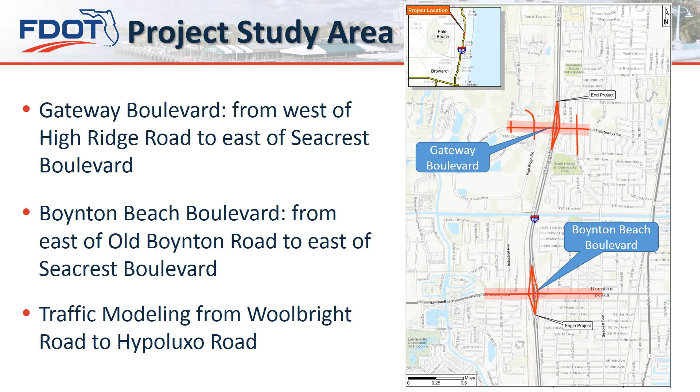The purpose of this public hearing is to share information with the general public about the proposed improvement, its conceptual design, all alternatives under study, and the potential beneficial and adverse social, economic, and environmental impacts upon the community.

The public hearing also serves as an official forum, providing an opportunity for members of the public to express their opinions regarding the project. Public participation at this hearing is encouraged and solicited without regard to race, color, national origin, age, sex, religion, disability, or family status.

Persons wishing to express their concerns about Title VI may do so by contacting either the Florida Department of Transportation District 4 office or the Central Office in Tallahassee. This contact information is also provided on a sign displayed at this hearing.

There are three primary components to tonight's hearing. First, the open house, which occurred prior to this presentation, where you were invited to view the project displays and to speak directly with the project team and provide your comments in writing or to the court reporter.

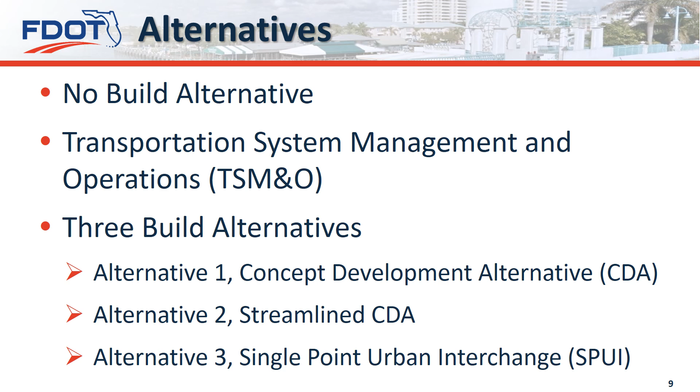Several build alternatives have been developed that would meet future travel demand and potentially minimize impacts to the community and the natural and physical environment. The build alternatives have been developed with input obtained throughout the study process from the general public, local governments, and environmental agencies.

NEPA requires that doing nothing to the existing conditions be considered during the environmental review process. This alternative is designated as the no-build alternative, signifying that no new improvements or construction would take place. Although this alternative does not meet the purpose and need for the project, it will be considered, serving as a baseline for comparison against other alternatives.

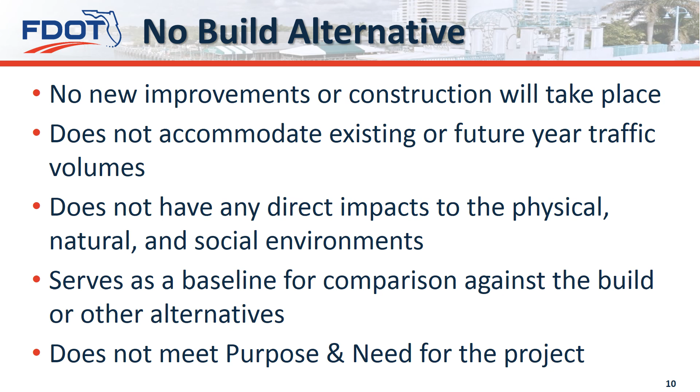The no-build alternative retains the existing roadway and interchange improvements and would not have any direct impacts to the physical, natural, and social environments, right-of-way, structures, or utilities.

The TSM&O alternative does not include roadway improvements that require right-of-way. This alternative includes utilizing the existing infrastructure and roadway design and optimizing traffic signal timing and coordination of signal systems. The TSM&O alternative alone cannot provide the much-needed capacity and intersection operational improvements.

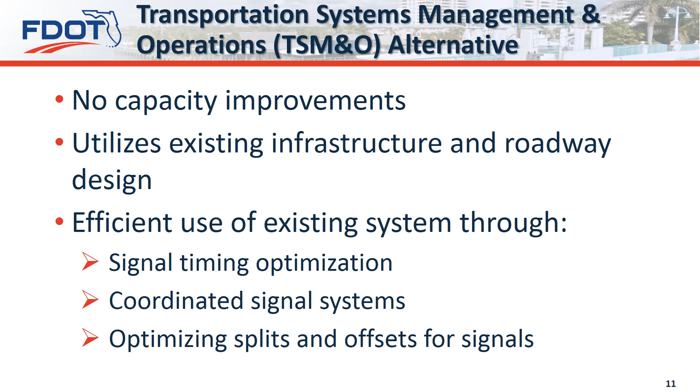Several build alternatives have been developed that would meet future travel demand and potentially minimize impacts to the community and the natural and physical environment. The build alternatives have been developed with input obtained throughout the study process from the general public, local governments, and environmental agencies.

These build alternatives include the Concept Development Alternative, or CDA, which is a conventional diamond interchange, a streamlined CDA alternative, and a single-point urban interchange, or SPUI.

Now we will discuss the proposed transportation improvements at the Boynton Beach Boulevard interchange.

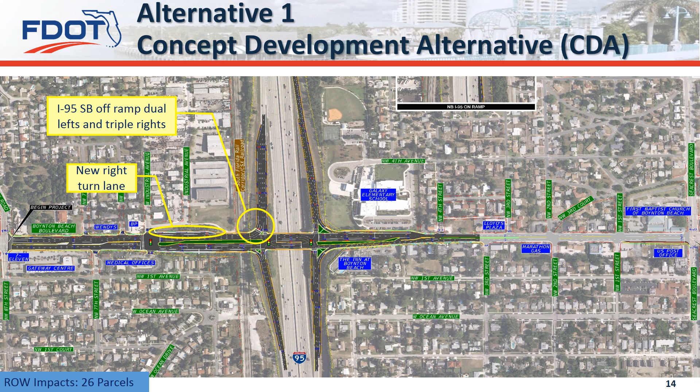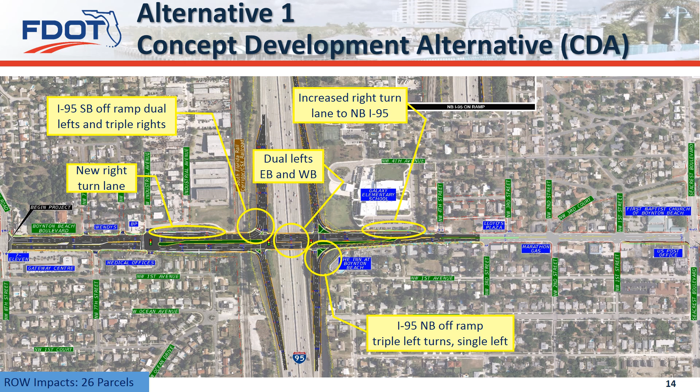The CDA alternative includes the following proposed improvements: a new right turn lane to Industrial Avenue, dual left and triple right turn lanes at the I-95 southbound off-ramp, dual left turn lanes eastbound and westbound, lengthened right turn lane to northbound I-95, and triple left turn lanes and a single right turn lane at the I-95 northbound off-ramp. This alternative is expected to impact 26 parcels.

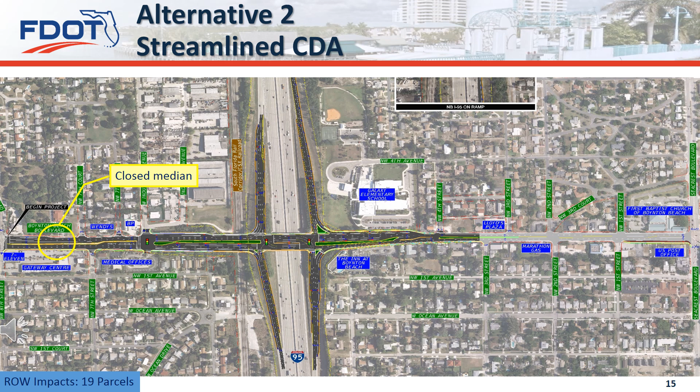The streamlined CDA alternative includes the following proposed improvements, similar to the CDA alternative with the following modifications: a closed median between 7th Street and Old Boynton Road, dual right and single left turn lanes and a shared left-right lane at the I-95 southbound off-ramp, and triple left and dual right turn lanes at the I-95 northbound off-ramp. This alternative is expected to impact 19 parcels.

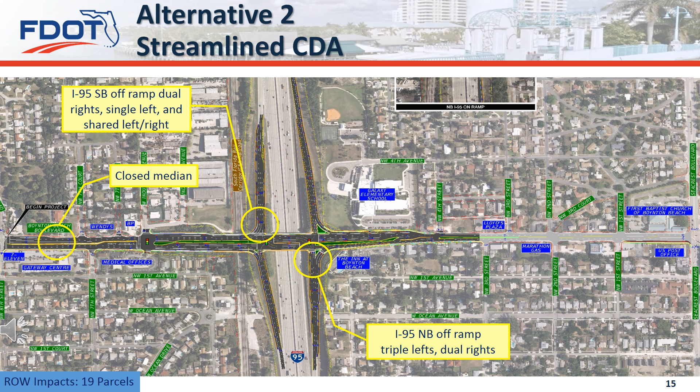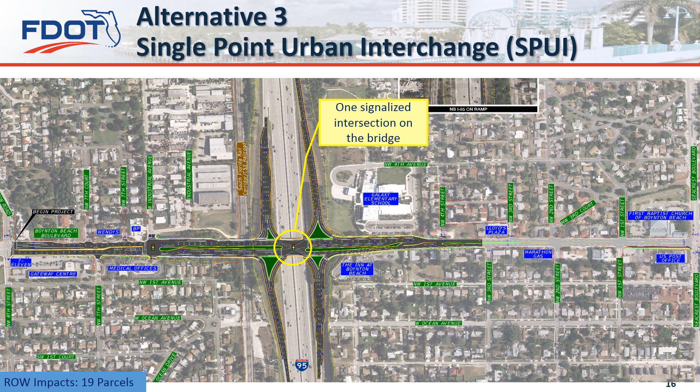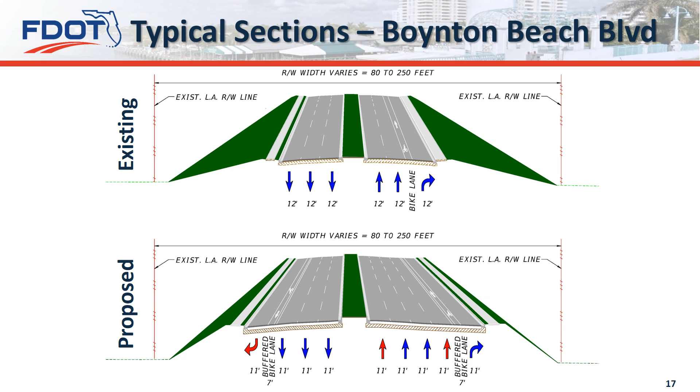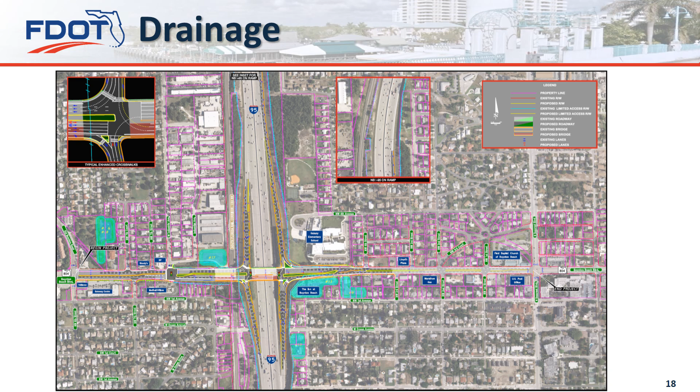In terms of environmental issues, all the alternatives have very similar minimal impacts. The largest difference between alternatives is related to right-of-way impacts. Build Alternative 1 would impact 23 parcels, and Build Alternatives 2 and 3 would impact 16 parcels. The recommended Build Alternative 2 has the potential to displace one resident.

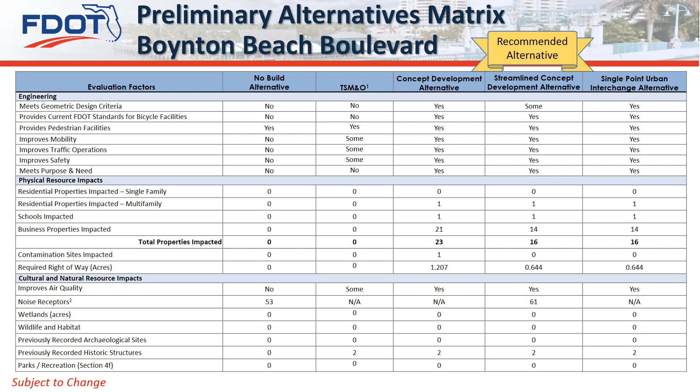Cost estimates prepared for all three build alternatives indicate the recommended alternative has the lowest total estimated costs at $39 million. All build alternatives provide better facilities for bicycles and pedestrians, with the addition of buffered bike lanes and enhanced crosswalks at the interchange ramps.

Preliminary traffic operational analysis indicates that all three build alternatives provide better traffic operations than the no-build and TSM&O alternatives, reduction to northbound and southbound I-95 off-ramp queuing, and reduction to intersection delays along the project corridor.

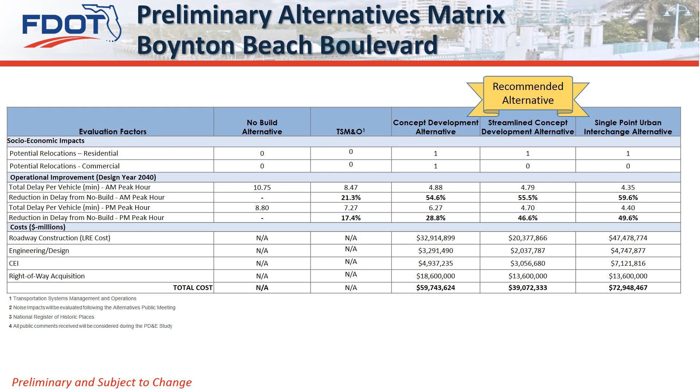Following the July 28, 2016 Alternatives Public Workshop, a meeting was held with FDOT District 4 to discuss the comprehensive resources evaluation, transportation and traffic studies, costs, and involvement of the public, local, and state officials, and select a recommended alternative for each interchange. The recommended alternative for the project area was chosen by FDOT on January 26, 2017.

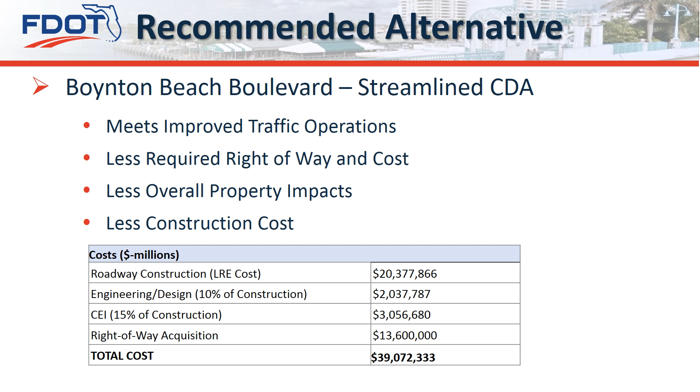Alternative 2, the streamlined concept development alternative, was chosen for the State Road 804 Boynton Beach Boulevard interchange. The Boynton Beach Boulevard preferred alternative is the streamlined CDA.

At Boynton Beach Boulevard, we anticipate 16 impacted parcels for roadway improvements, 2 pond sites, and the relocation of 1 family.

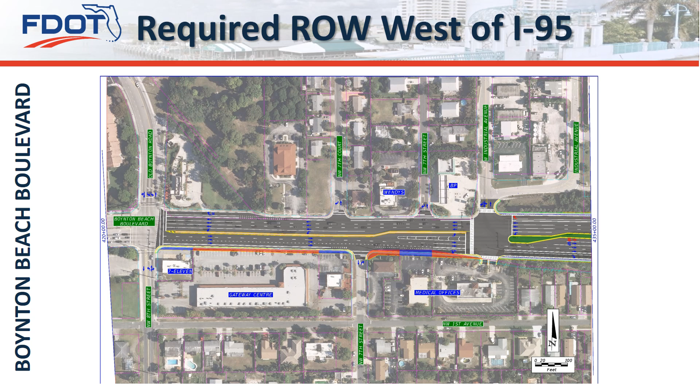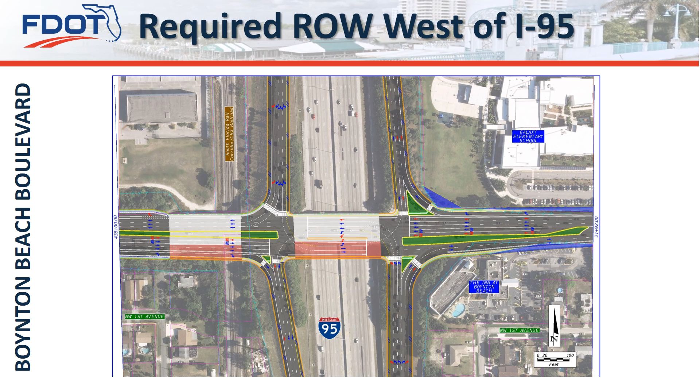West of I-95, the anticipated required right-of-way is located on the south side of Boynton Beach Boulevard. East of I-95, the anticipated required right-of-way is located on the north and south sides of Boynton Beach Boulevard. Farther east of I-95, the anticipated required right-of-way is again located on the north and south sides of Boynton Beach Boulevard.

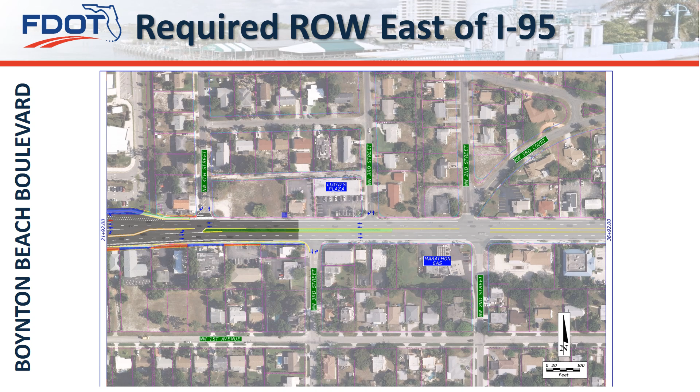Now we will discuss the proposed transportation improvements at the Gateway Boulevard interchange. Alternative 1, the Concept Development Alternative, or CDA, includes the following proposed improvements.

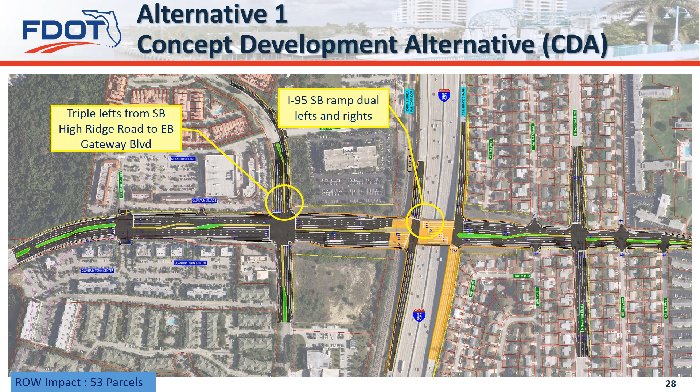Triple left turn lanes from southbound High Ridge Road to eastbound Gateway Boulevard. Dual left and right turn lanes at the I-95 southbound off-ramp. Single right turn lane from southbound Seacrest to westbound Gateway Boulevard. Dual left turn lanes from northbound Seacrest to westbound Gateway Boulevard. Triple left and single right turn lanes at the I-95 northbound off-ramp.

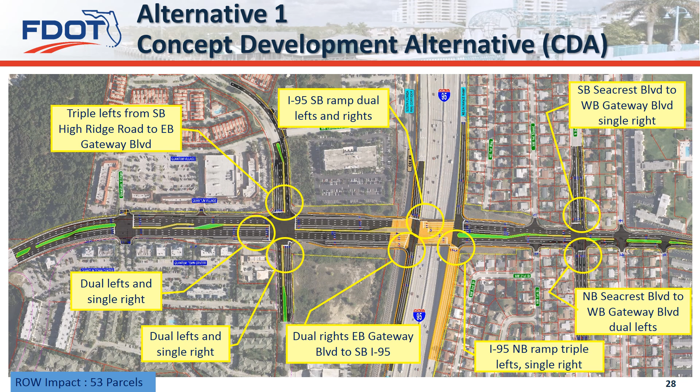Dual right turn lanes from eastbound Gateway Boulevard to southbound I-95. From High Ridge Road northbound, dual left turns and a single right turn to Gateway Boulevard. From Gateway Boulevard eastbound, dual left turn lanes and a single right turn to High Ridge Road. This alternative is expected to impact 53 parcels.

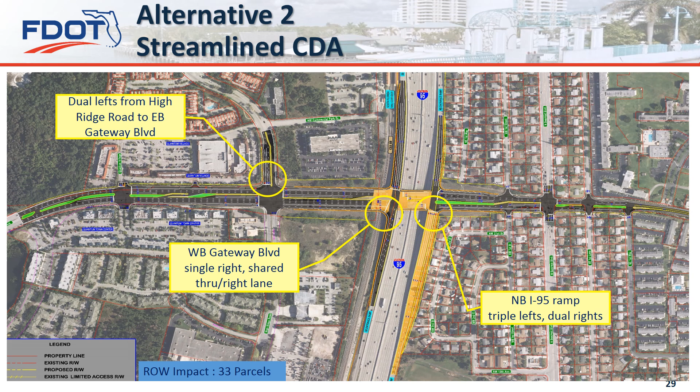The streamlined CDA alternative includes the following proposed improvements, similar to the CDA alternative with the following modifications: dual left turn lanes from southbound High Ridge Road to eastbound Gateway Boulevard; a single right turn lane and shared through-right turn lane from westbound Gateway Boulevard to southbound I-95; and triple left and dual right turn lanes at the I-95 northbound off-ramp. This alternative is expected to impact 33 parcels.

Alternative 3, the SPUI alternative, includes the following proposed improvement: 1 signalized intersection on the bridge. This alternative is expected to impact 33 parcels.

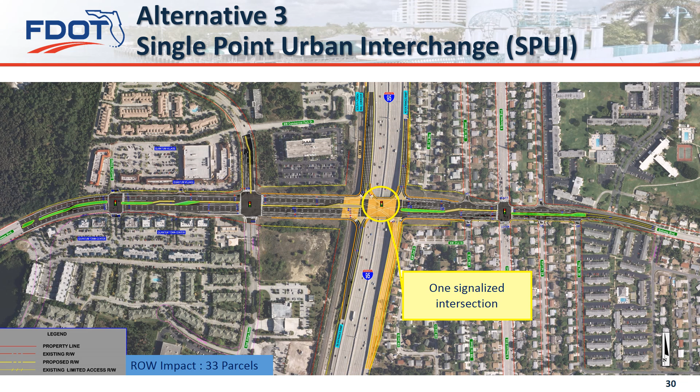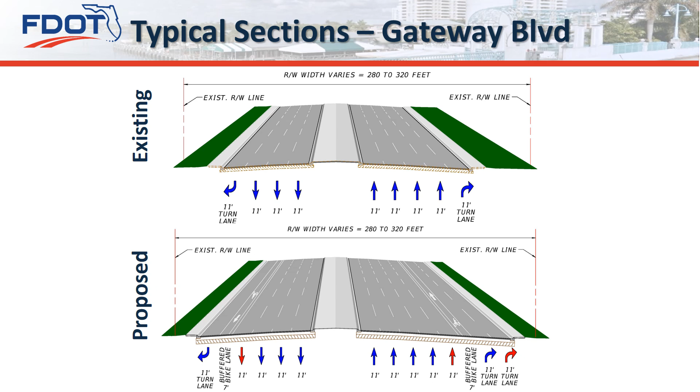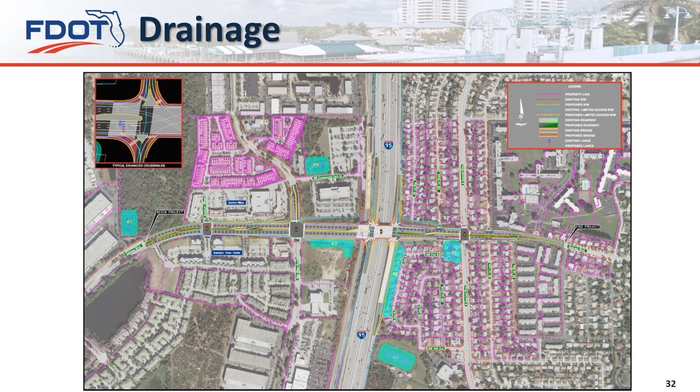Multiple pond site locations were evaluated to accommodate drainage at the I-95 Gateway Boulevard interchange. One pond site on the east and west sides of I-95 will be selected.

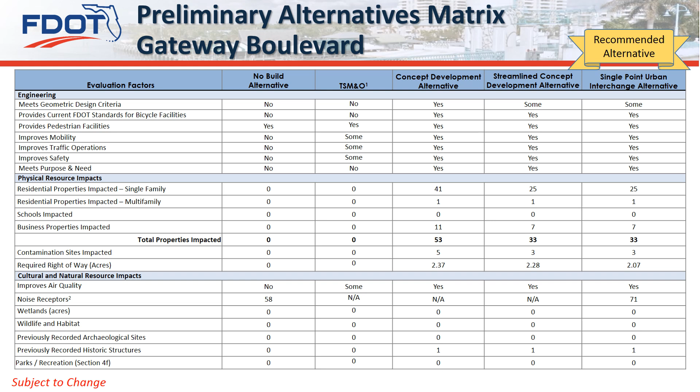In terms of environmental issues, all the alternatives have very similar minimal impacts. The largest difference between alternatives is related to right-of-way impacts. Build Alternative 1 would impact 53 parcels, and Build Alternatives 2 and 3 would impact 33 parcels. The recommended Build Alternative 3 has the potential to displace 6 residences and 1 business.

Cost estimates prepared for all 3 build alternatives indicate the recommended alternative has the second lowest total estimated cost at $36 million. All build alternatives provide better facilities for bicycles and pedestrians, with the addition of buffered bike lanes and enhanced crosswalks at the interchange ramps.

Preliminary traffic operational analysis indicates that all 3 build alternatives provide better traffic operations than the no-build and TSM&O alternatives, including reduction to northbound and southbound I-95 off-ramp queuing and reduction to intersection delays along the project corridor. In terms of overall operational improvements, the recommended alternative proposes the best operational results at the I-95 ramp intersections with Gateway Boulevard, and in general terms throughout the project area.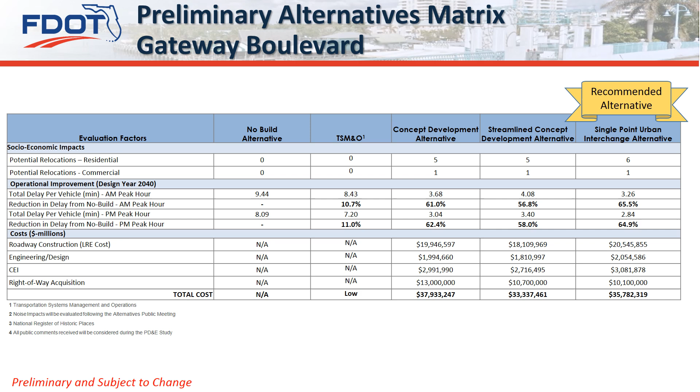Following the July 28, 2016 Alternatives Public Workshop, a meeting was held with FDOT District 4 to discuss the comprehensive resources evaluation, transportation and traffic studies, costs, and involvement of the public, local, and state officials, and select a recommended alternative for each interchange. The recommended alternative for the project area was chosen by FDOT on January 26, 2017. Alternative 3, Single Point Urban Interchange, was chosen for the Gateway Boulevard interchange.

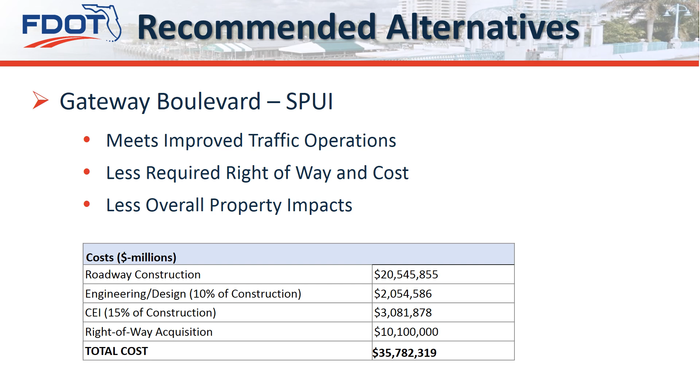The Gateway Boulevard preferred alternative is the Single Point Urban Interchange, or SPUI. One of the unavoidable consequences on a project such as this is the necessary relocation of families or businesses.

At Gateway Boulevard, we anticipate 33 impacted parcels for roadway improvements, 2 pond sites, and the relocation of 6 families and 1 business.

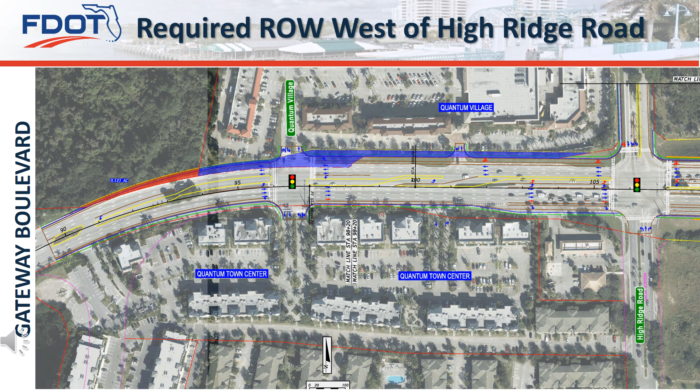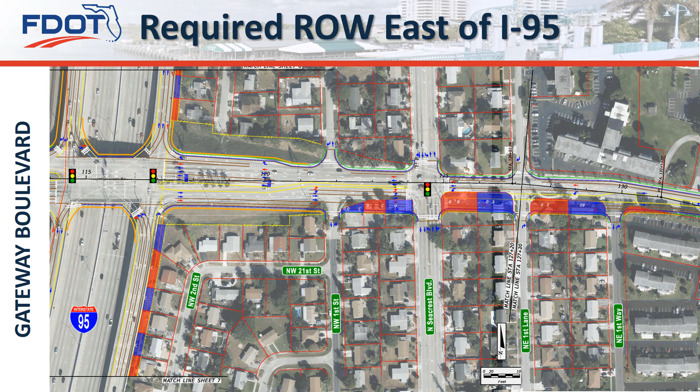West of I-95 and High Ridge Road, the anticipated required right-of-way is located on the north side of Gateway Boulevard. East of I-95, the anticipated required right-of-way is located on the south side of Gateway Boulevard and the east side of the northbound exit and entrance ramps. Additional anticipated required right-of-way is located on the east side of the northbound exit and northbound entrance ramps.

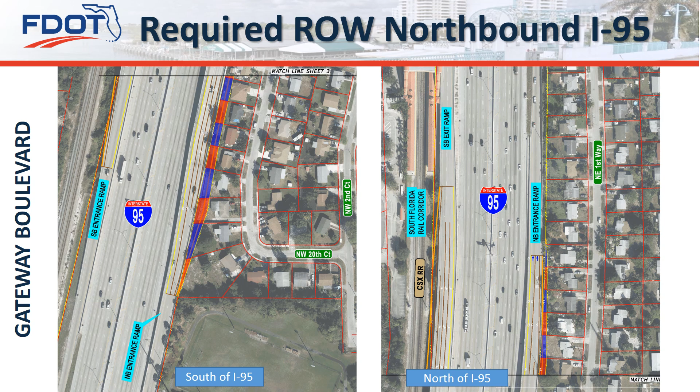The PD&E study has evaluated the social, environmental, economic, and engineering impacts associated with proposed transportation improvements for each interchange location. The FDOT will continue to monitor any other environmental concerns that may arise. There are no anticipated impacts to any resources, with the exception of potential right-of-way acquisition.

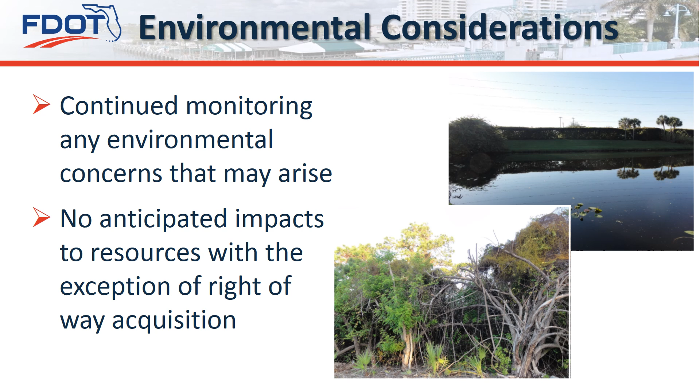The environmental documents detailing the review of all resources analyzed have been available for public review since August 8, 2017, and will continue to be on display for 10 days after the public hearing at the Literacy Coalition of Palm Beach County, 3651 Quantum Boulevard, Boynton Beach, Florida 33426; the Boynton Beach City Library, 208 Seacrest Boulevard, Boynton Beach, Florida 33435; and the Florida Department of Transportation, District 4, 3400 West Commercial Boulevard, Fort Lauderdale, Florida 33309. The documents will remain on display through Friday, September 8, 2017, and are available for review on the project website.

at www.95gatewayboynton.com.

All right-of-way acquisition will be conducted in accordance with Florida Statute 339.09 and the Federal Uniform Relocation Assistance and Real Property Acquisition Policies Act of 1970, commonly known as the Uniform Act. If you are required to make any type of move as a result of a Department of Transportation project, you can expect to be treated in a fair and helpful manner and in compliance with the Uniform Relocation Assistance Act. If a move is required, you will be contacted by an appraiser who will inspect your property.